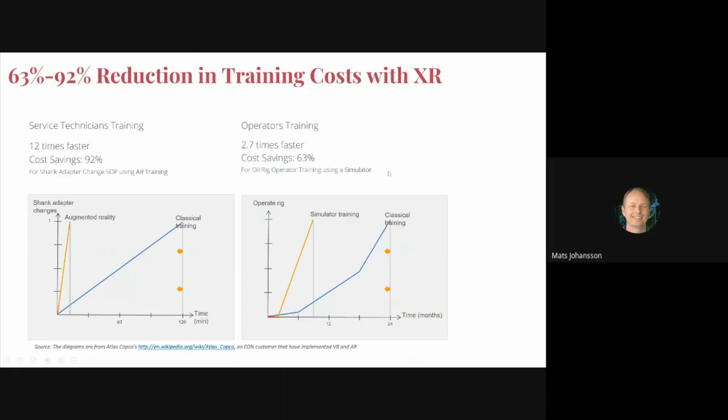The use case was a shank adapter change, and it's huge numbers, but if you think about it, there's a lot of overhead in training. Maybe you have physical training facilities, equipment, tools, products, travel, instructors. With AR, you could bring this directly to the field and have a tremendous amount of cost savings. Similarly, on the right for operator training, this use case was an oil rig operator using a simulator, you could have up to 63% cost savings.

Eon has tremendous experience in enterprise. We have, especially up to 2019, worked a tremendous amount with use cases in not only energy, as you see here, but also other areas like aerospace, manufacturing, medical, defense, etc. The value for the student is really around learning and training faster, being more confident, creating better emotional connections, and more focus. And there's lots of studies out there, but I'll play a little summary here from PricewaterhouseCoopers.

We have conducted a study on virtual reality learning. We found learners in VR required less time to learn. They had higher emotional connection to the content, higher confidence, and were less distracted during the training.

Okay, so there's a lot more data here that we're happy to share, but let's move forward. So right now, if you look at AI specifically, one of the problems is that as you get most of the feedback in text or voice, it's not connected to the physical world. And that's really one of the main parts of Eon's solution: we remove this obstacle, take the genie out of the bottle, you could say. We do this with your AI-based avatar companion that you can interact with in real time, and you'll see some good examples here shortly.

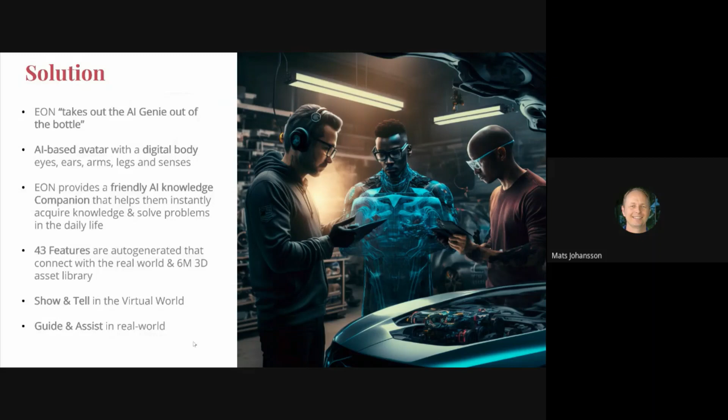And then there's guide and assist in the real world. So here we use spatial anchors to connect information in the real world and provide the training right then and there in the physical environment. We have developed what we call a cognitive AI architecture. So it includes the spatial AR that I mentioned, the persistent tracking, things like AI image recognition. So if you come up to a piece of machinery, you don't know what it is, you can take a picture and get feedback. LiDAR scanning for digital twin development, multi-user for team training, team procedures.

And then we have this approach of being agnostic. So we support all kinds of devices, maybe most importantly, phones, tablets, PCs, Macs, but also your high-end VR and AR devices if you have them. 95% of our users access the content on a phone or a tablet.

We have 6 different products that help us do this. And the first one was EON XR. This is code-free development and deployment. We added then digital twin, where you can annotate the real world, as you see in this picture here. We added spatial meetings for team training, team interactions.

Metaverse Builder to create more complex worlds, complex experiences with multiple objects, environments, etc. Interact to create more advanced interactions, maybe like advanced motions, fire, explosions for safety training. And then most recently, the EON AI Assistant for conversational learning that we talked about.

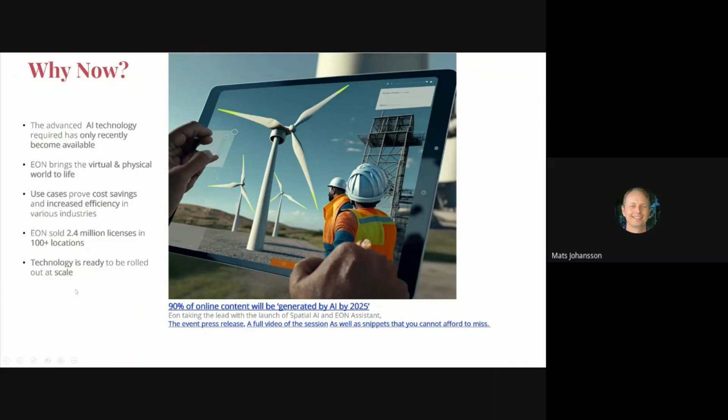Now let's drill down specifically on energy. These are a summary of the main use cases as we see. There are other ones outside these, of course, but oil and gas is a big one. Chemicals, close relative, but also a big use case. Renewable energy, as we know, wind, solar, hydroelectric will grow, but so will also nuclear. In our electrified world, it's going to play a role there, and it's definitely a big use case moving forward. And the last one, energy storage.

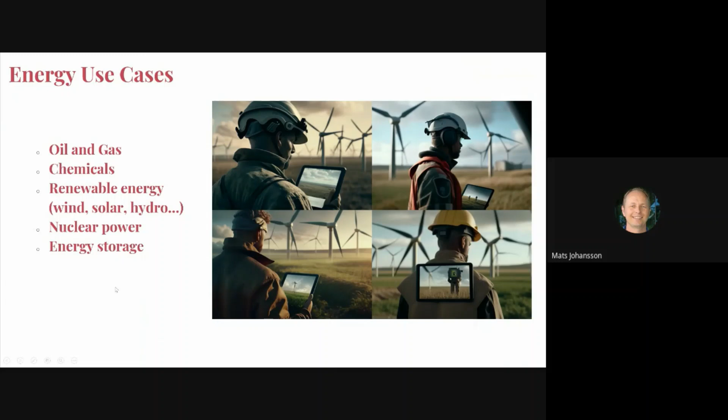Now, if you drill down and look at what are some potential applications here, and again, this is not meant to be exhaustive, but to give you some guidance. Safety training is front and center in energy. Operator training. This can be individual operator training, but also team training. Maybe we have an operator and you have a team of field technicians, so you can train the whole team.

MRO, or maintenance, repair, and assistance. Remote collaboration, either in terms of repair, maintenance procedures, or product development for that matter. Hazard identification, remote equipment troubleshooting, training for energy efficiency. And there are many more, but this gives you an idea on some of the main applications.

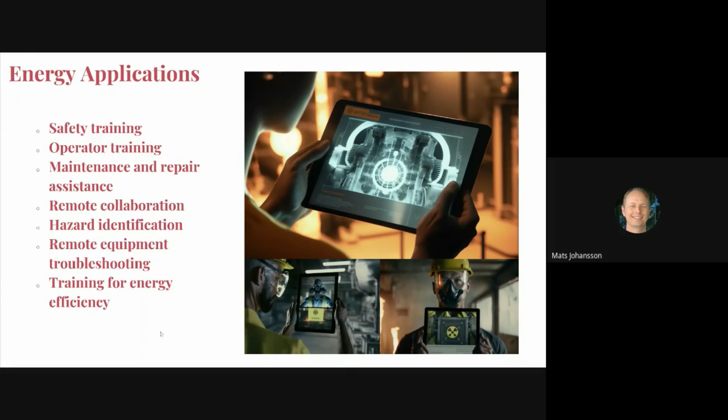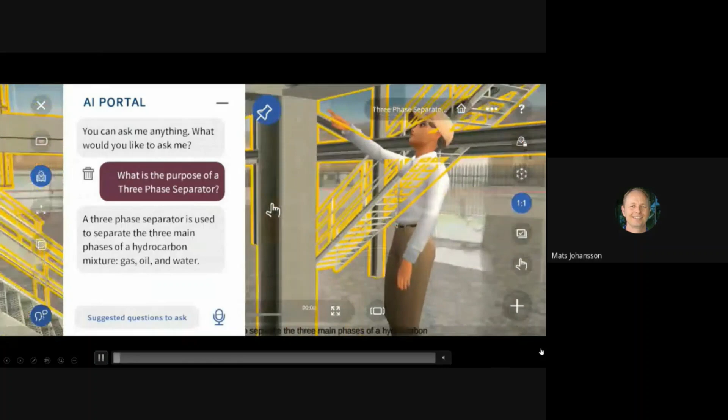Let's take a look. So this is a basic introduction to a 3-phase separator. And I will start the video here. So here we have, I turned off the sound here, but here we have the AI assistant. And I'm asking some questions here. You see the text feedback. We can go through kind of the basics. This uses public domain information. You can also feed your AI or train your AI with your own database.

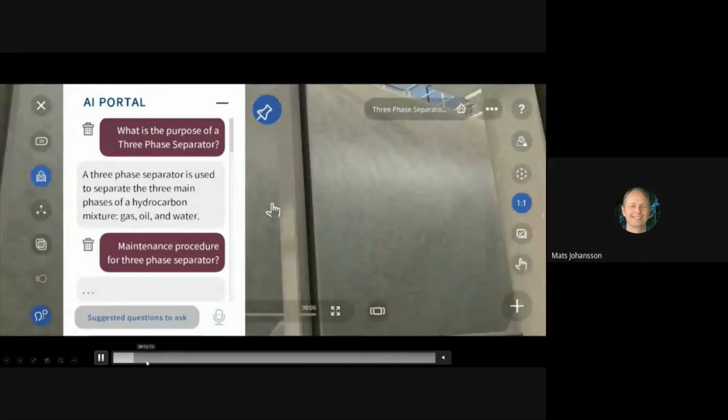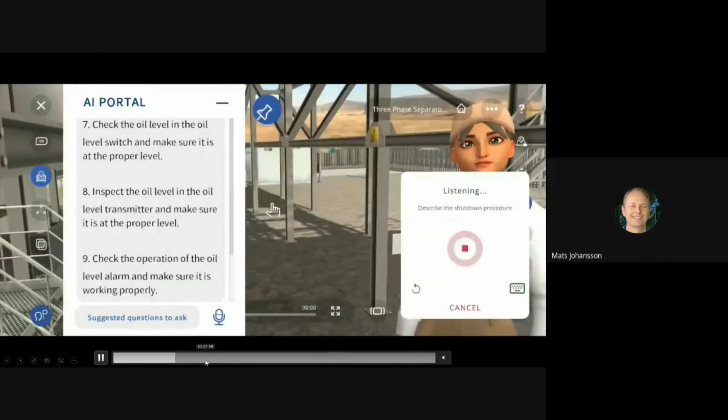So that's another option. So here we're asking about the maintenance procedure. She's thinking about it here, and we'll see the feedback here shortly. So check the oil level, inspect the oil level transmitter. I'm going to fast forward a little bit, as there's a lot of different steps here, and we have limited time. As we'll see here, going forward, we can also move in the space. So here I moved up towards the upper decks of the 3-phase separator.

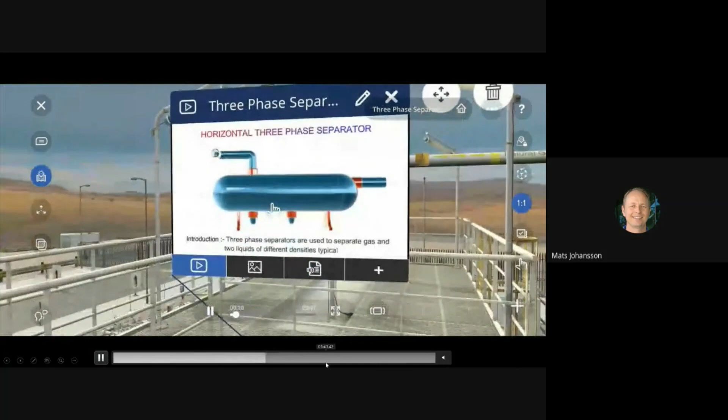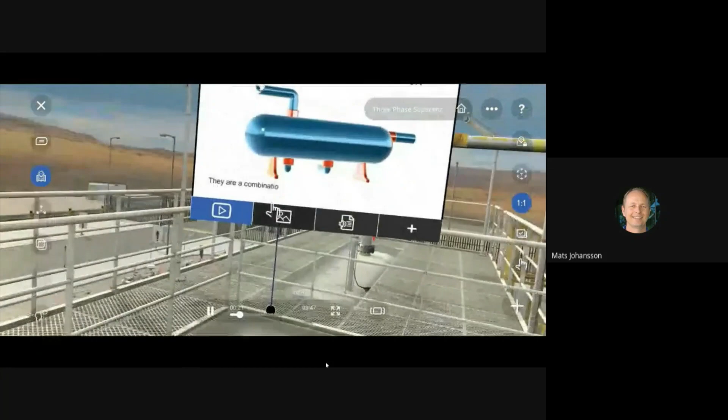And we'll see in a second here that the AI assistant, here we go, created what we call a knowledge portal. And I can, of course, go back and edit this, but it's basically a media presentation with images, videos, documents, outlining the functions of a three-phase separator. We can also include safety training. So here we're bringing in some information on fire safety training for oil and gas.

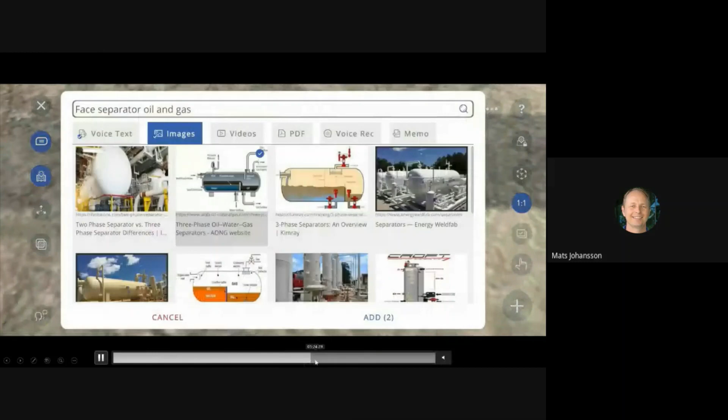You can also add your own knowledge portals. So here I added one, and just like we saw before, we can have videos, text, but we can also upload our own specific documents. So here I uploaded for this specific separator the P&ID, piping and instrumentation diagram, which is central for training for something like this.

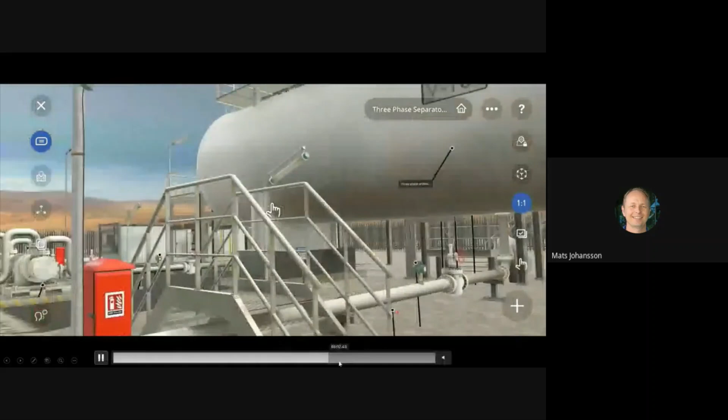Here we can also point out different main components of the system and talk about it and record it. And then we can see the feedback here from the 3D avatar or subject matter expert going through. We can also add assessment, quizzes, different things.

One neat thing that we get as an output is an AI report. So this will be part of the learning experience, and it includes all the interactions that were done to create this experience, lesson plan, the P&ID, the different questions that were asked, and we can, of course, go back and edit this if needed as well.

Let's take a look at a few more use cases. So here is a wind turbine use case.

Wind turbine manufacturer. The turbine is designed to generate electricity from the wind and is used in both onshore and offshore wind farms. The turbine has a rated capacity of up to 5.x MW and can generate up to 15,000 MWh of electricity per year. The turbine is equipped with a direct drive system, which eliminates the need for a gearbox, resulting in a more reliable, efficient turbine. The turbine also has a low noise.

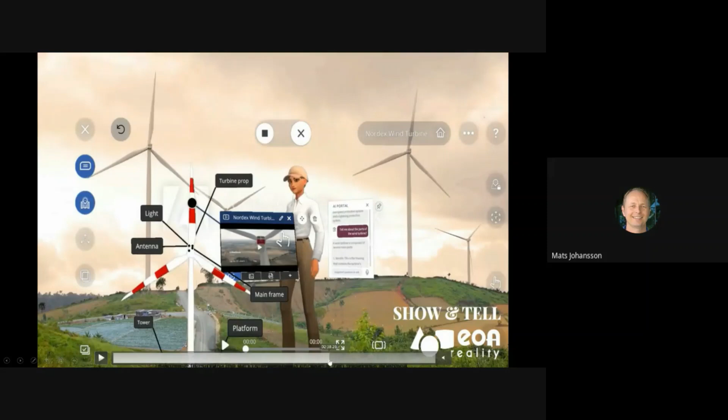So there you saw a good example of show and tell, where the student interacts in real time with the AI assistant to get information and feedback. Fast forward here a little bit, we see the knowledge portals, as we saw with the separator example. Here we also see annotations, so different main parts of the wind turbine. And again, you can also create quizzes, assessments, etc. as you go.

Okay, let's do one more example from nuclear.

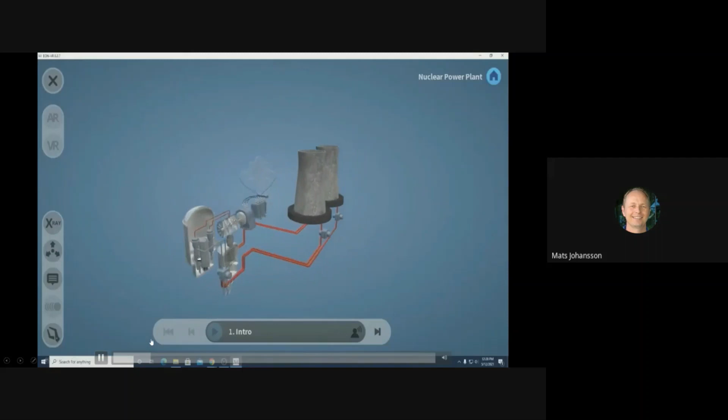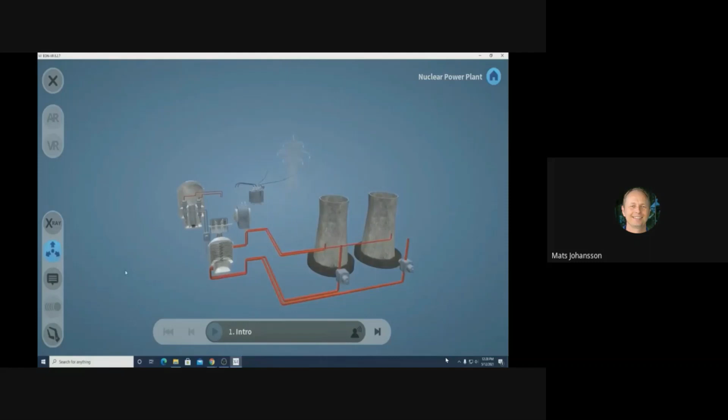Hello, my name is Coral. I put together this lesson in EON XR to explain the process of how a nuclear power plant generates electricity. I'm a huge nuclear energy nerd, and I find it fascinating. So I hope this lesson helps my fellow nuclear energy nerds to learn more about the process and how exactly the energy transfers from a bunch of uranium rods to powering your phone. Most lessons I've found on nuclear energy highlight the dangers of radiation and go into horror stories, so I'm hoping this lesson helps to uncomplicate the process for new learners. I've never seen the inside of a...

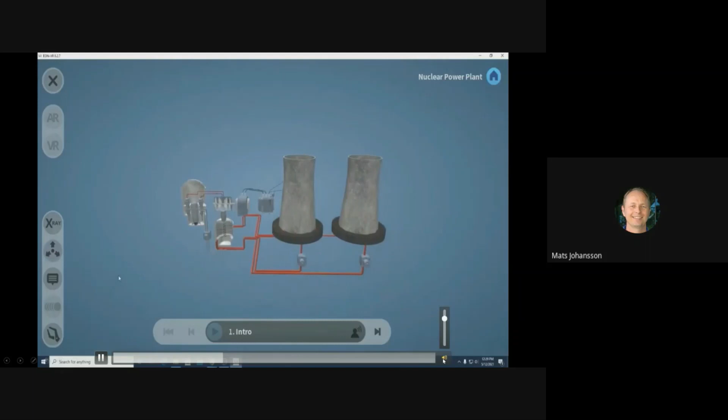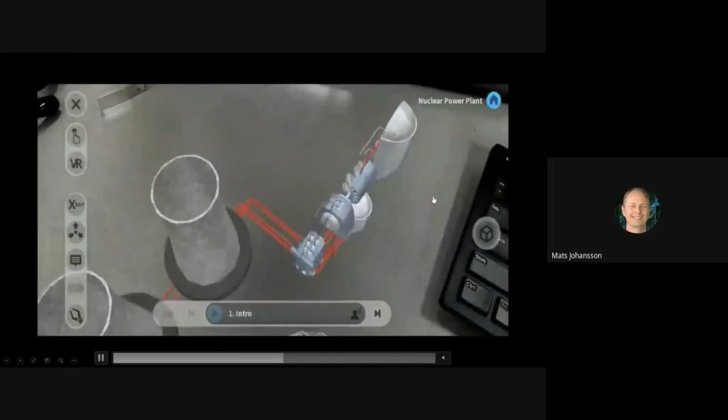So here, as you saw, we're seeing the experience on desktop. If I fast forward here a little bit, we can see we can quickly go to augmented reality, and we can see the scaled down version, or you can scale it up to one-to-one scale that we saw in the separator example just a few minutes ago. So those are some brief examples.

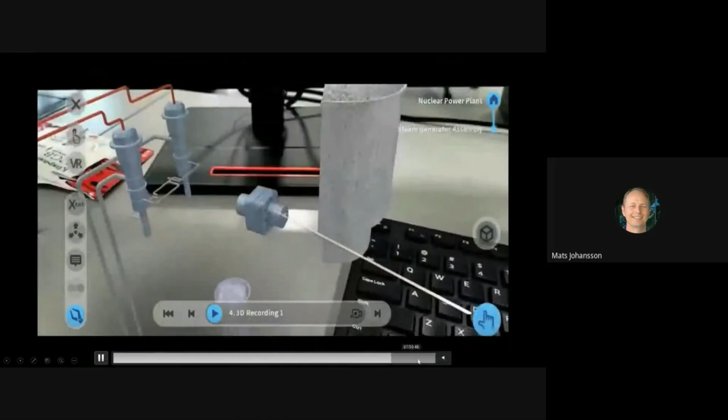There is a lot more opportunity, and happy to share the presentation so you can dig in a little bit more. But let me talk a little bit about the business model. So EON has academic and enterprise pricing, and on the enterprise side, it's $124 per user a month for trainees and $190 for trainers. Beyond that, we have a number of different packages, from pilot to corporate-wide implementation.

And just recently, we have launched what's called the Enterprise Skills Program. And this gives availability for an initial use case for 10 or 30 users, with the cost going down to $45 per user a month. So please reach out to EON, and we'd be happy to look at your needs, whether you want to start small and scale over time, or go big right away.

And the next step, if you're interested, would be to set up a deep dive with one of our experts and really show the platform and the process and how you can develop content.